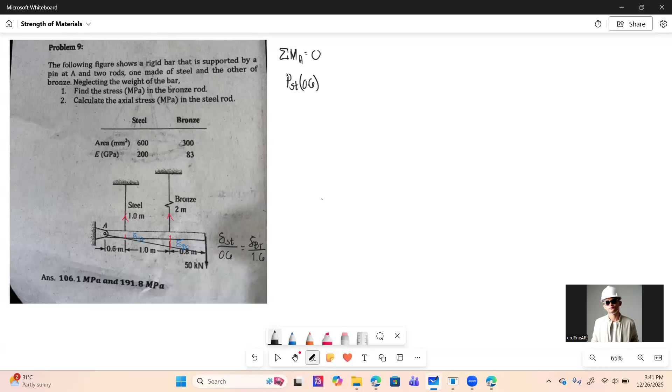So, moment at A equals 0. Unahin na lang natin tong P steel. So, force ni steel times moment arm. That's 0.6 plus force at bronze naman. That is 0.6 plus 1, 1.6. That is equal to 50 kilonewton. Take note na kilonewton yan. Times yung buong yan. That's 1.6 plus 0.8. That's 2.4. So, yan yung gagamitin nating isang equation. Pangalawang equation is this one.